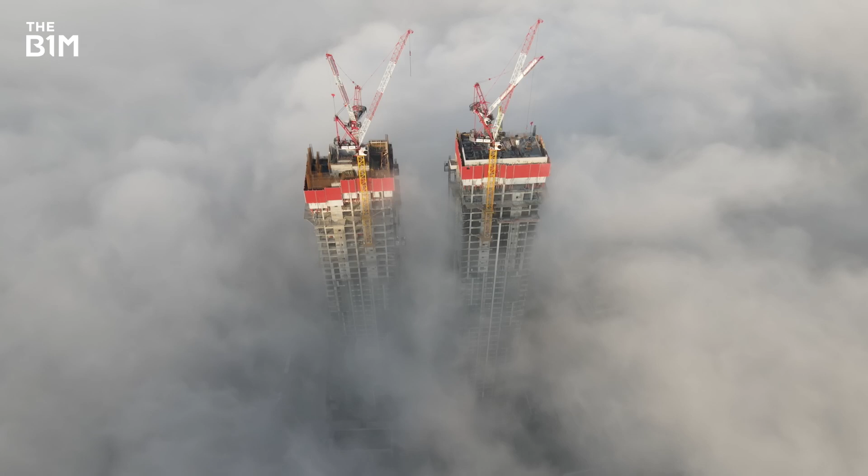There's a country in the Middle East that's been embarking on a massive construction spree. But we're not talking about the UAE, Qatar or Saudi Arabia. This is Israel, where half-built high-rises have been popping up and dominating the skyline for years.

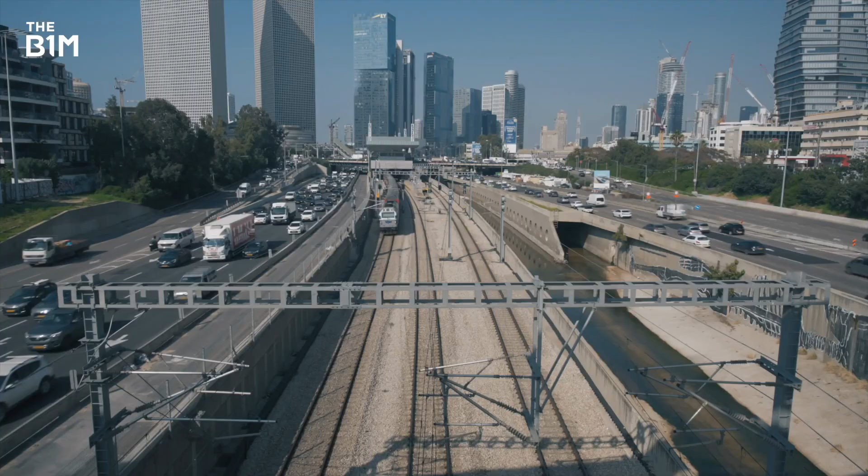Now a global hub for innovation, from startups to tech giants like Microsoft, and home to a growing population, demand for bigger buildings and infrastructure is on the rise. Getting the construction industry to adapt to this growing workload hasn't been easy, but technology is leading the way. This is how construction in Israel is gathering some serious speed.

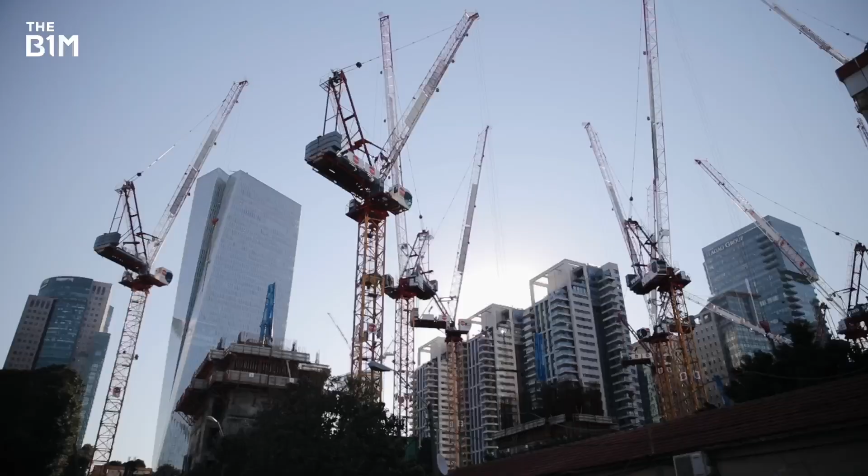If you've been to Tel Aviv in the last few years, the chances are you've probably seen a lot of these. In fact, it's become a nationwide trend. Cranes sprouting up in all directions is now a common sight right across the country, and that's because there's been a lot to do. Between July 2021 and June 2022, more than 72,000 homes began construction across Israel. That's the highest figure since the 1990s, when it experienced a wave of immigration from the former Soviet Union.

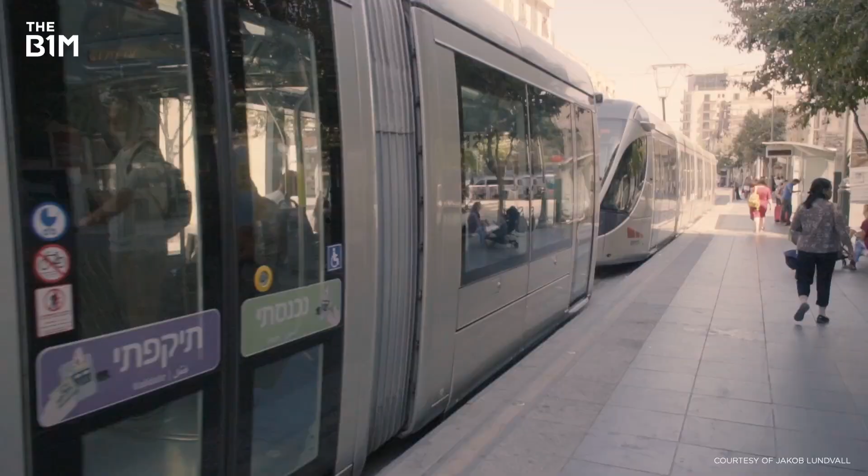30 years later, the reasons for this new construction push are fairly similar. Israel's population is soaring, meaning a lot more homes are needed, as well as new infrastructure to support them. At the end of 2022, the country reached almost 9.7 million residents, an increase of 2 million in just over a decade. There's not much space in the main cities, so a lot of the new housing is being delivered as high-rises.

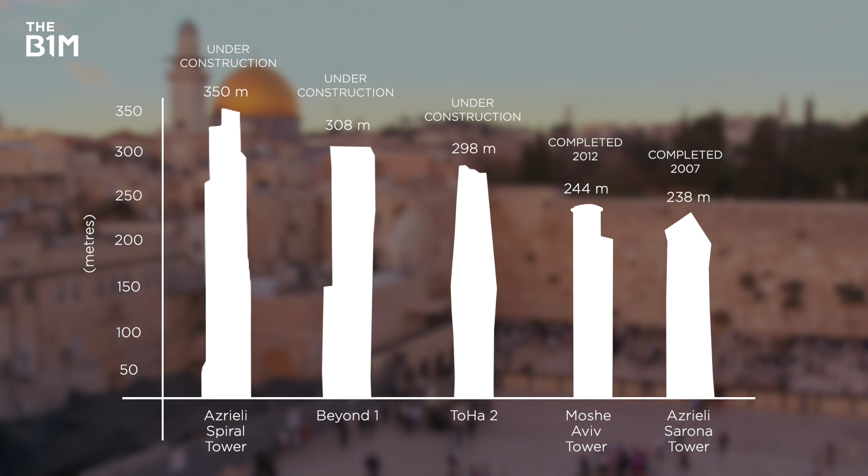Although Israel has fewer actual skyscrapers than other countries in the region, there is one building in the works that will break its current height record, and by some distance. The Azrieli Spiral Tower in Tel Aviv is set to become the country's first super tall skyscraper when it completes in 2026, with a planned height of 350 metres.

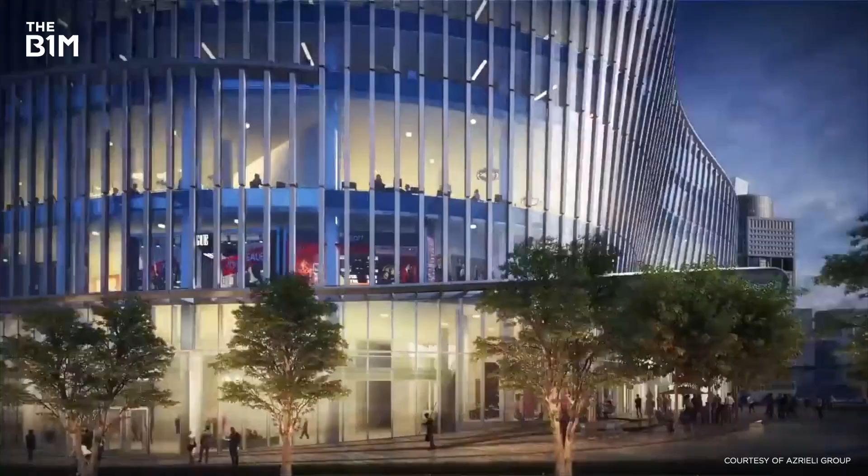Designed by Kohn Pedersen Fox, it's the very definition of a mixed-use building. Above the base that's dedicated to retail, there'll be offices, followed by residences, and then a hotel, with the floor plates gradually narrowing as the tower rises.

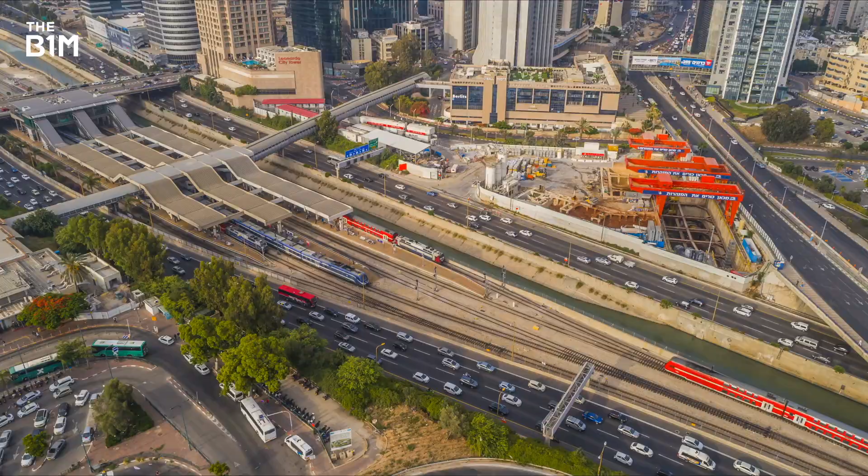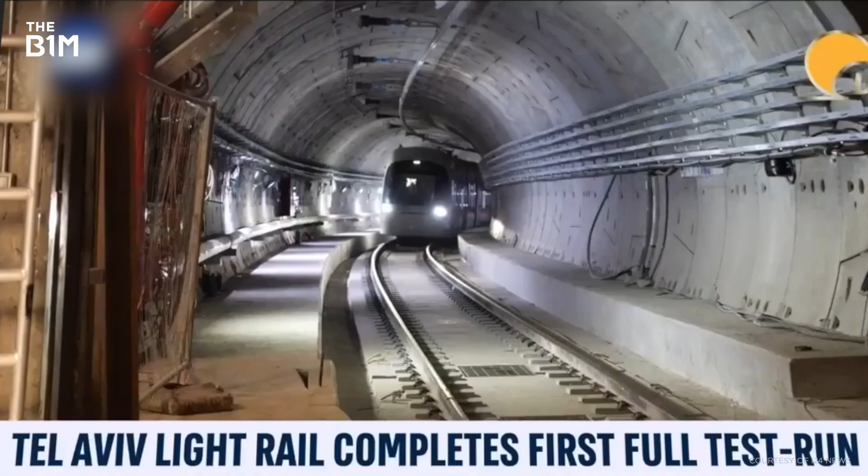There's been loads going on the infrastructure side too, but by far the biggest task of all is Tel Aviv's new mass transit system. Described as the largest and most complex transport project in Israel's history, it consists of 3 light rail and 3 metro lines, with the first due to open in April 2023. 24 kilometers long, the route will run from Bat Yam in the south to several smaller cities on the outskirts of Tel Aviv, like Bnei Brak.

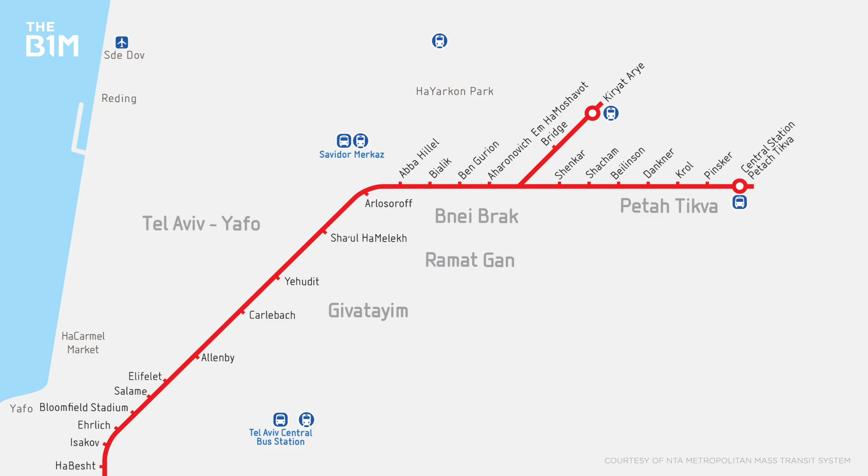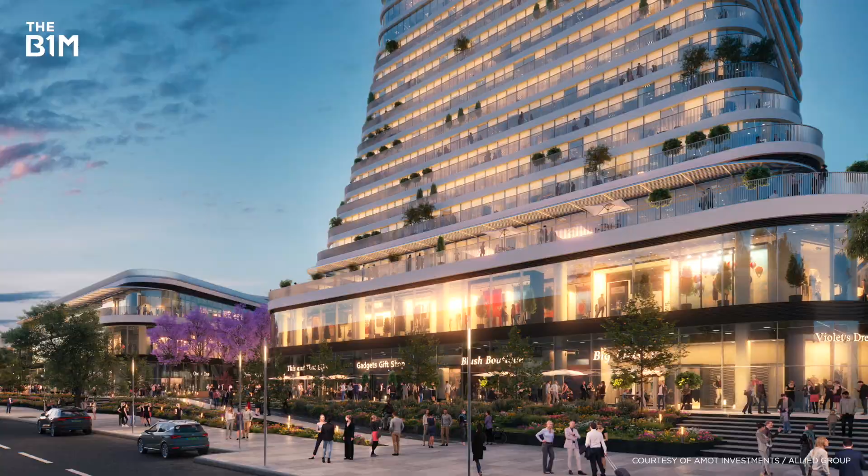Here the built environment is a lot more low-rise, but it's beginning to change thanks to new schemes like this, called HYP. A joint project between Amot Investments and Allied Real Estate, the 52-storey building will offer 85,000 square meters of office and commercial space.

Now we can see in Israel a lot of projects designed for high-tech companies, young companies, and green environment buildings are also very important. All the new building of Amot is LEED Platinum, the greenest the building can be.

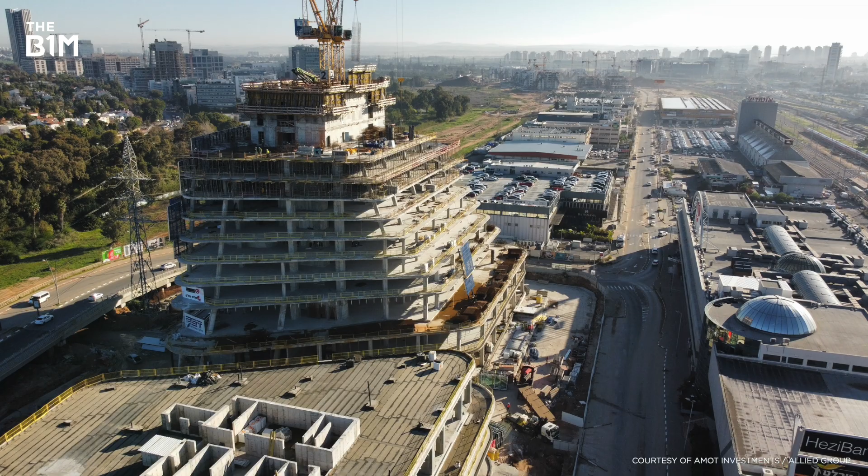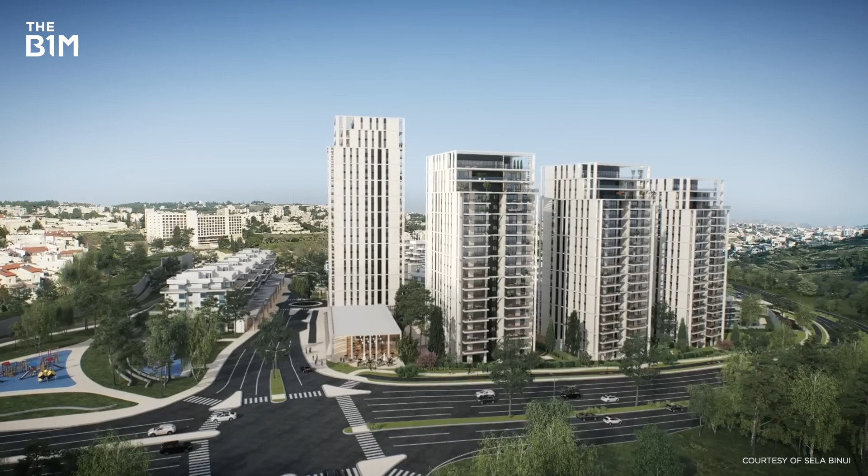This tower is just one example of how buildings across Israel aren't just increasing in number and getting taller, they're becoming more complex too. Over in Jerusalem, construction of the consulate towers is being carried out in an area with unusually difficult terrain. And in Herzliya, near Tel Aviv, a new auditorium for Reichman University is proving challenging.

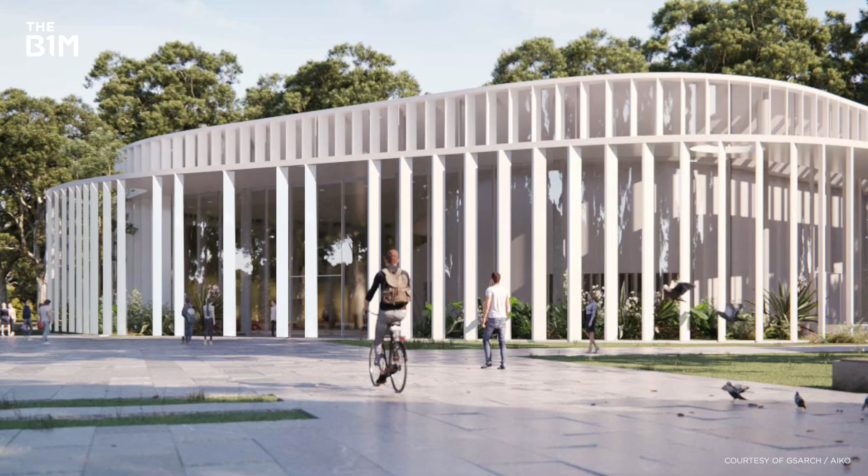To get the finished result looking like this, contractor Sadei Projects is having to work with high ceilings, beams that weigh over 50 tons, and a glass facade, all features that are potentially problematic. Surely then, this has all made things more difficult for the construction sector here. How are the companies responsible for delivering these projects stepping up to the task?

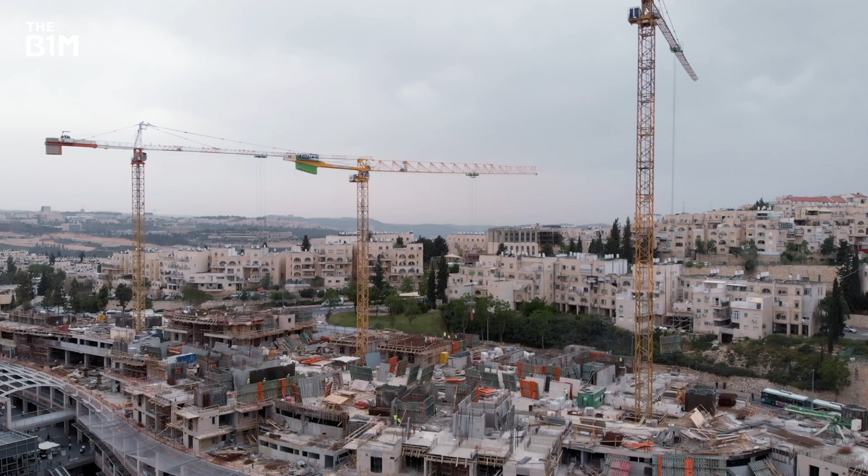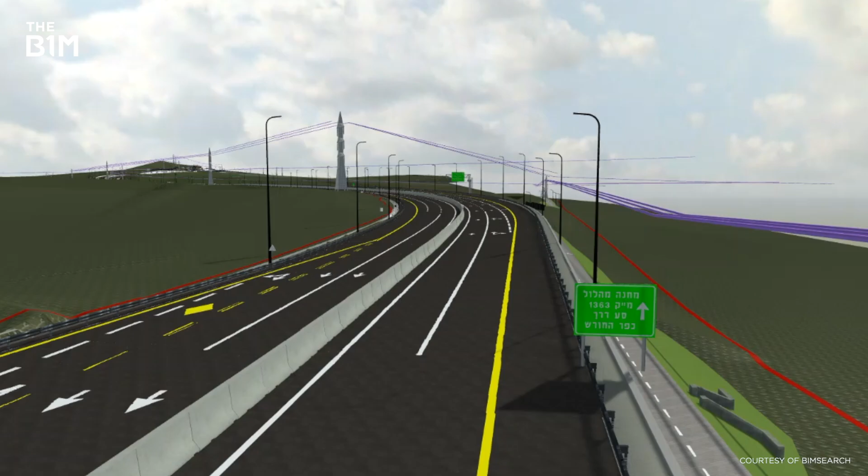Well, in a place known for innovating, it's unsurprising that tech is helping Israel's industry rise to the challenge, particularly the use of building information modelling, or BIM. Now, that's a lot more than just 3D modelling. It's a data-rich digital working environment that allows construction teams to collaboratively organise and coordinate a project's key information. That all works to boost speed and efficiency while minimising errors and cutting waste.

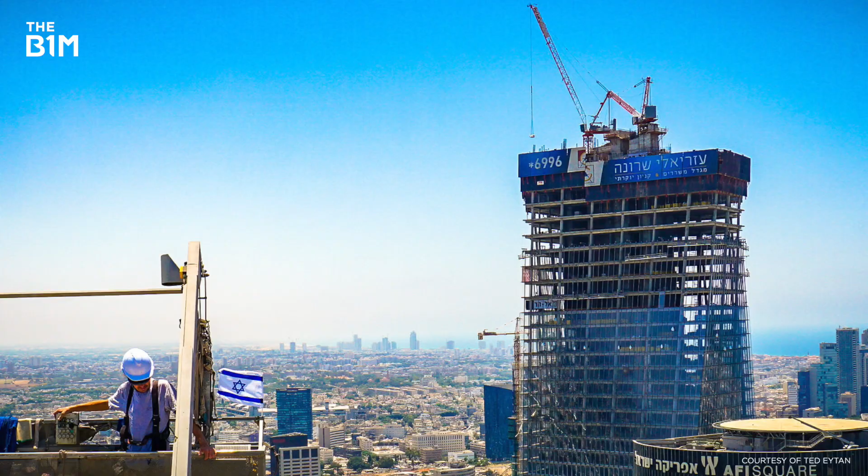Although the country was at first slow to adopt BIM as compared to elsewhere, that all changed when the Ministry of Defence made it mandatory, convincing much of the country's wider market to do the same.

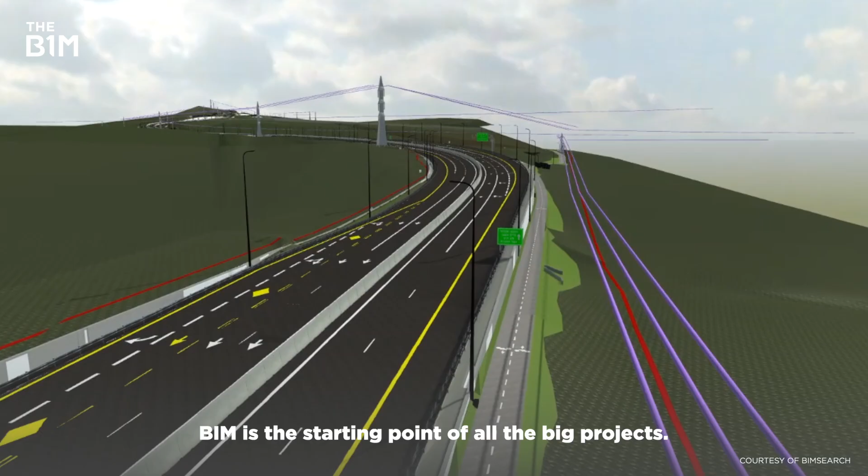This is what we see in Israel in the past few years. BIM is the starting point of all the big projects. I don't think there is one big mega project that is not managing in BIM for now in 2023.

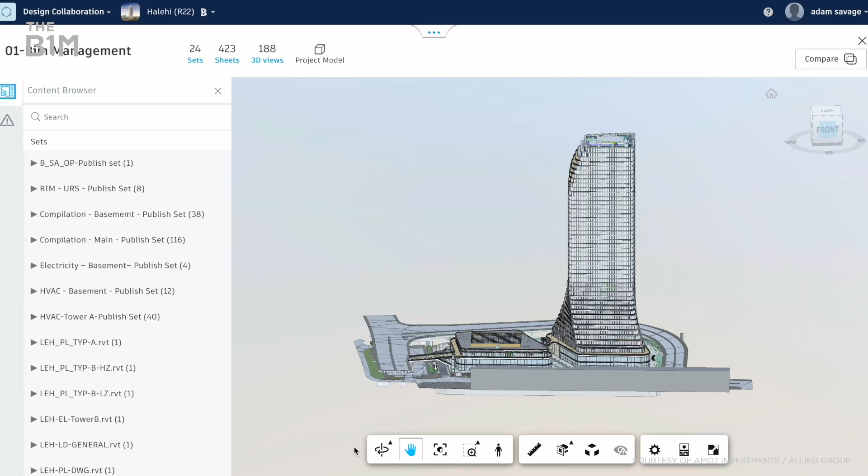The tech may have taken off, but for many, extracting the right data from the coordinated graphical information models that are produced in a BIM environment remains pretty difficult. It can be hard to find what you want, whether you're a design manager like Eyal or someone who's less familiar with digital tools, especially on complex projects.

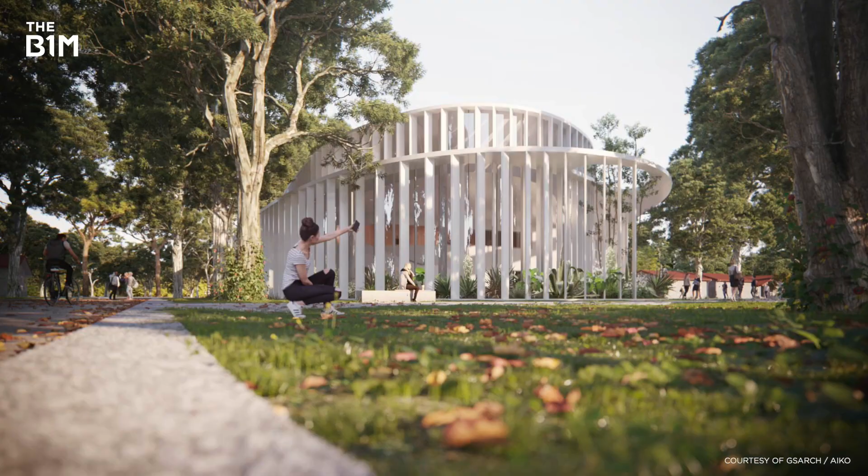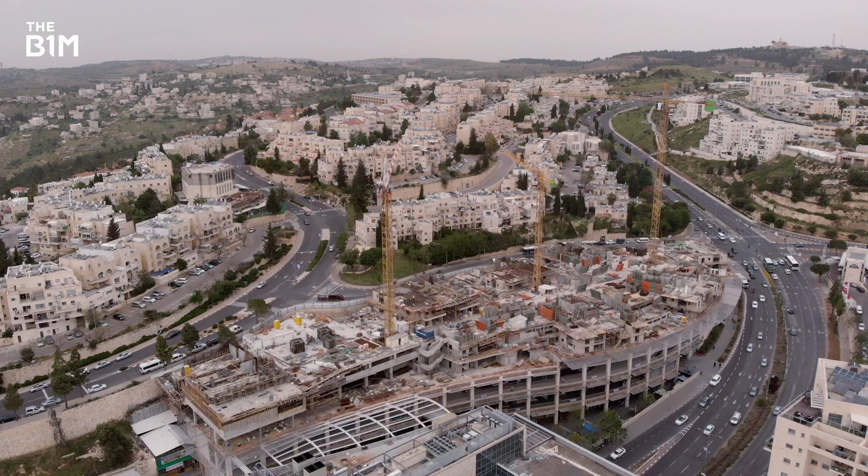Getting projects completed faster is always going to be something to aim for, no matter where you are in the world. Here though, the construction sector is coming under particularly heavy pressure. To keep hitting its targets, Israel needs to keep building around 70,000 homes every year. They might have their work cut out, but the country's construction companies are in a much better position than they were, and there's little doubt that new tech has had a big part to play.

Sites like these might turn out to be temporary in other places, but you can't help but feel that this wave of construction has only just begun.